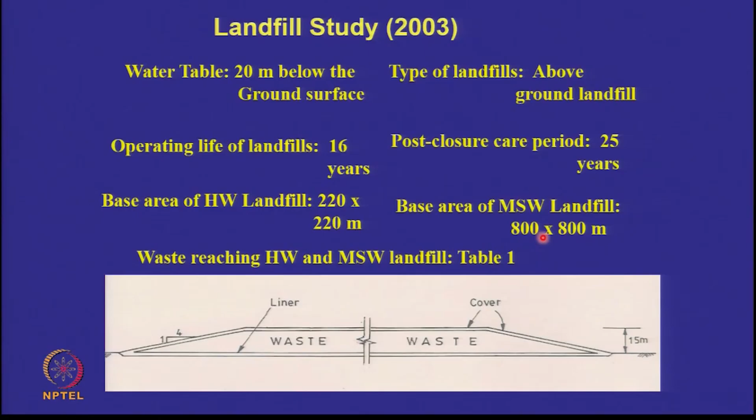First I'd like to look at a landfill study, for the year 2003. It was for an above ground landfill. Water table was 20 meters below the ground surface. Operating life was 16 years. Post closure care period 25 years. Two types of waste, hazardous waste, then the size of the landfill is 220 meters by 220 meters square.

And municipal solid waste, 800 meters by 800 meters. So first let's look at the municipal solid waste landfill. 1000 tons per day of waste coming in. Total height of the landfill was 15 meters, out of which the liner plus cover would take 2.7 meters, and the balance 12.3 would be taken by the waste and daily cover. As a thumb rule, your daily cover may be 10% of the waste.

Remember that the total height of the landfill is 15 meters, 2.7 has gone into the liner and cover. That's why people keep wanting to make the liners and cover thinner and thinner. If you put a geosynthetic clay liner instead of clay, you will get a meter or 90 centimeters. If you put a geocomposite drain instead of sand, you will get 30 centimeters more.

So everybody wants to make this thinner and thinner. But we are going to look at this case: if 700 tons per day comes in onto the same area, the height is about 11 meters, and if 1300 comes in, it's about 20 meters. Here the base area is 800 meters by 800 meters, whereas here the base area is 220 meters by 220 meters. Here it's tons per annum, please see, this is TPA and this is TPD. The amount of hazardous waste which comes out is normally much smaller than the amount of municipal solid waste which comes out in any urban area.

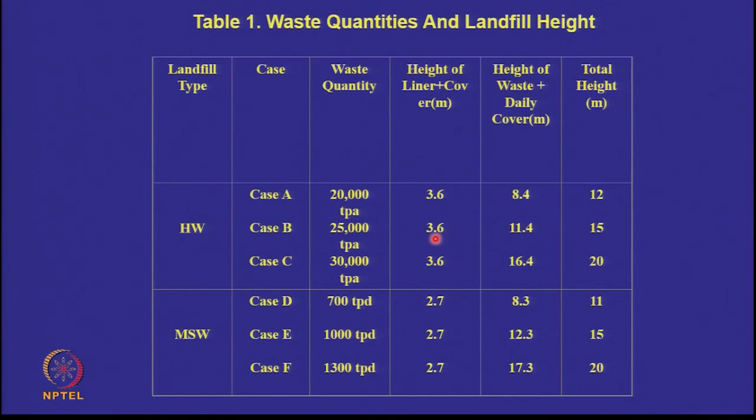So here we are talking of a hazardous waste landfill. The height of liner and cover has gone up from 2.7 meters to 3.6 meters. You can go and look back at the components. Here the base case is 25,000 tons per annum. 15 meters will be the height, 11.4 meters for the waste and daily cover, and 3.6 for the liner and cover. We are going to look at liner costs, cover costs, landfill costs, and influence of the height of landfill.

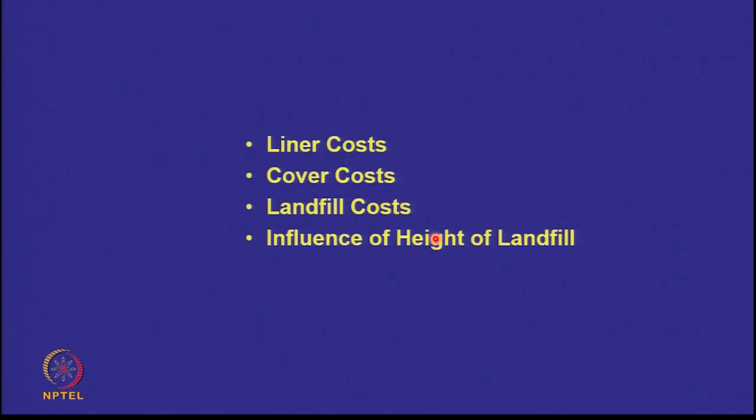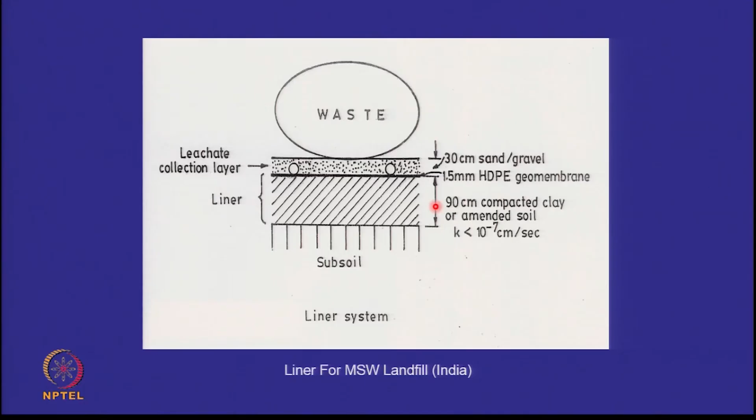Let's just recall, this is our liner for a municipal solid waste landfill. Thickness is 0.3 plus 0.9, 1.2 plus other elements. If you look at it very closely, it is going to have many more components: a separator filter, the leachate collection layer, a protector, the geomembrane, the clay, and a separator filter. So many layers.

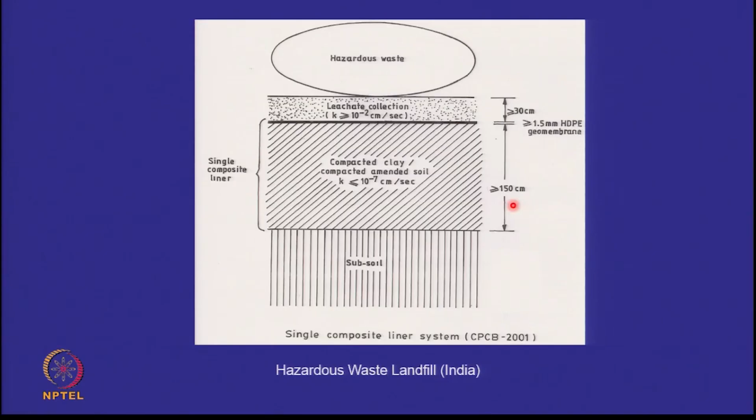If I look at the hazardous waste landfill, this becomes even thicker. This is 1.8, 0.3 here, 1.5, 1.8 meters just at the bottom. If it's a double composite liner, there are even more elements.

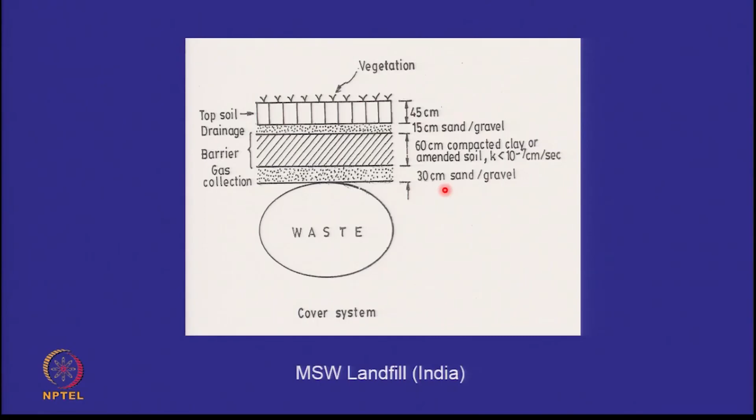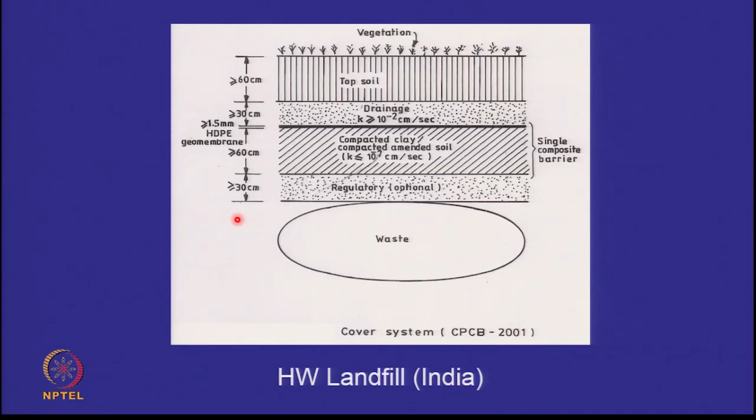Similarly, if you look at the cover, in the municipal solid waste landfill: 45 cm, 0.45 and 0.15 and 0.6 and 0.3. So this whole total becomes 1.5 meters. 1.5 at the top, 1.2 at the bottom makes it 2.7 meters, which you saw in the table that I had shown you. If you have a hazardous waste landfill, 0.6 and 0.3, 0.9, 0.6 and 0.3, 0.9, that becomes 1.8 meters at the top for the cover. So out of the 15 meters, 1.8 meters is being taken by the cover, and similarly 1.8 meters is being taken by the single composite liner.

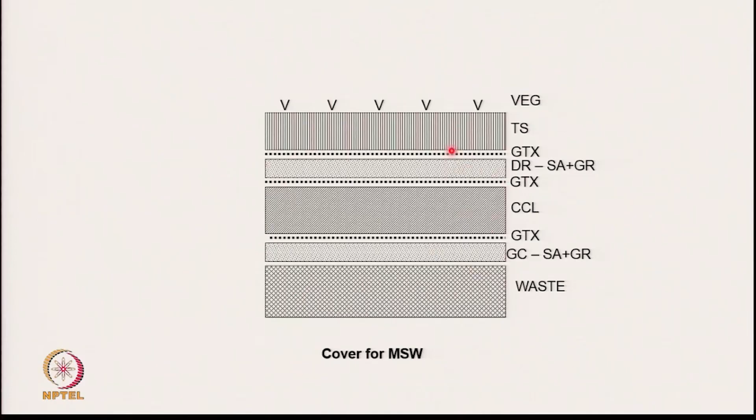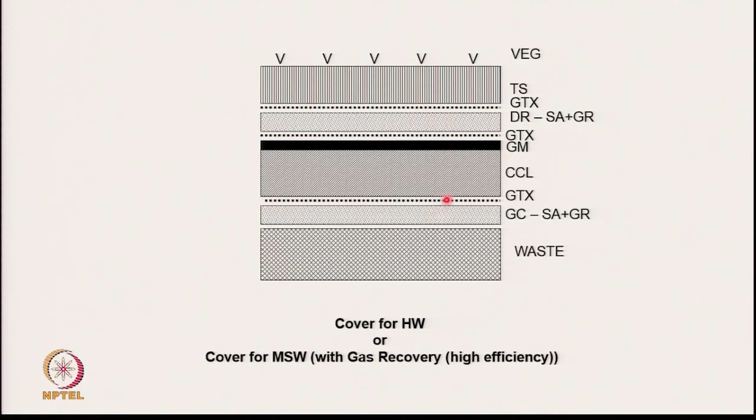And again, in the cover you have many interfaces, and if you are trying to recover methane gas as well, then you have to put a geomembrane. So this becomes the cover for municipal solid waste landfill also and hazardous waste. But remember, in municipal solid waste landfill, the thickness of the elements is different from the hazardous waste landfill.

So to estimate the cost, you need to know the cost of materials. In 2003, when this exercise was done, the cost of placing, spreading and compacting the waste was rupees 50 per cubic meter. It's like a huge earthwork problem. You understand this? Earthworks, you want to make an embankment, how do you pay the contractor? You have to construct a road embankment from here to Meerut, 5 meters high. How will you work out the cost of the project? Fundamentally, it will be the cost of earthwork.

You will find out the volume of the earth, multiply it by the unit rate at which the earth is available, at which it can be transported, at which it can be placed with compaction. You multiply and you get a value.

Same thing here. Once the waste arrives at the site, you place it, spread it and compact it, and the cost of that is 50 rupees per cubic meter. If you have local soil which you are going to use as topsoil, the rate is 120.

This is 2003, please note, 14 years ago, so these were the rates at that time. Medium fine Yamuna sand 200 rupees per cubic meter, Badarpur sand 400 rupees per cubic meter (coarse sand), gravel 550 rupees per cubic meter, clay from 200 kilometers 600 rupees per cubic meter, amended soil - Delhi silt plus 5% bentonite - 250 rupees per cubic meter.

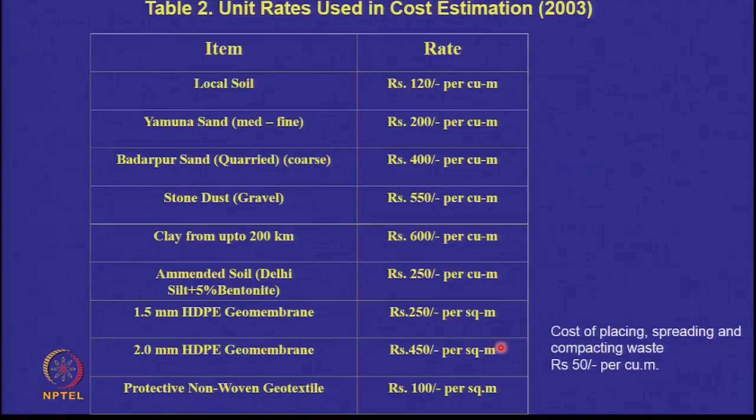So I am giving you an idea of what these cost in 2003. I will also give you the values today. Just before coming to this class, instead of looking at a CPWD manual, because they may not have everything regarding geomembranes and geotextiles and their unit rates, I rang up a civil contractor friend of mine and said I'm giving this lecture today, I need the latest rates, and I'll look at it a little later. But let's see what this study threw up.

Now, to do the costing of a liner system, you know the thickness, you know the areas, you work out the volume of material required. So if I look at the liner system, I would have a leachate collection layer, a geomembrane, a compacted clay layer, a filter between the waste and the leachate collection layer, a protector between the leachate collection layer and the geomembrane, and some pipes, sumps and pumps.

So these are the quantities multiplied by the unit rates for the municipal solid waste landfill, and these are the quantities multiplied by the unit rates for the hazardous waste landfill. This is 800 by 800 meters square - the amount of waste coming in is much larger. This other one is 220 by 220 meters square.

So you get some figure at the end which you can convert into cost per square meter, just like we have cost of construction per square foot. The figure which comes out for a liner system here in 2003, with a landfill height of 15 meters, was 800 rupees per square meter for municipal solid waste and 990 rupees for hazardous waste. But this is a single composite liner.

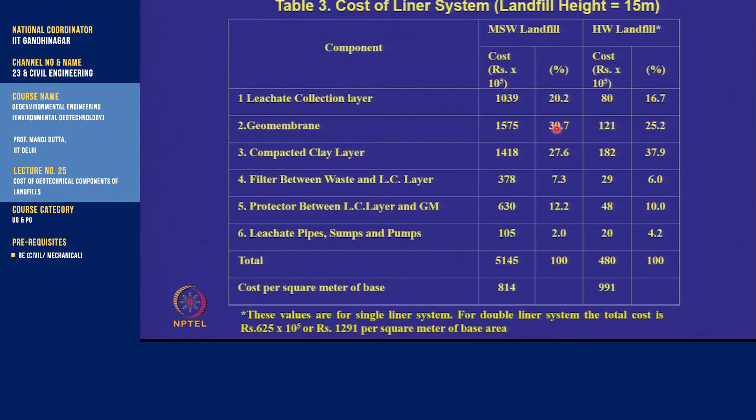If you go to a double composite liner, it became about 1300 rupees per square meter, separately listed here. So remember, the geomembrane, the leachate collection layer and the compacted clay layer are the main components of this cost.

Let's now look at the cover costs. Now we have become experts. Topsoil, then drainage layer, then geomembrane, then compacted clay. Here in the municipal solid waste you don't have this geomembrane. Gas collection layer, separators between this layer and that layer and this layer and that layer.

Similarly to what we did, this cost comes to 590 for municipal solid waste and 1000 for hazardous waste. Is this more than the liner or less than the liner? You remember what was the cost for the liner - about 800, and this is about 600, and the reason is there is no geomembrane in it.

Should I put a geomembrane in it? What will happen? The cost of geomembrane I showed you is 250 rupees per square meter - that will get added onto it. So the cover is no cheaper than the liner. First, please remember that, especially if you are trying to extract methane gas.

Look at the hazardous waste landfill. What is the cost here? And what is the cost of the single composite liner? 990. So it's the same cost. Similar costs are emerging.

Then let's look at the total landfill costs and see what is the contribution of the cover and the liner to it. There's the site acquisition cost. So I told you, don't take land costs into account. Mostly for these projects, the government will give these at nominal value, because either they'll be self-operating the landfills, the municipalities, or even if they give it to an operator, you can't sell it at a commercial value. It's your waste and my waste. If you give it to an operator, you will charge him for the land, and he will charge us back at the tipping fee point. So there's some site development cost, site assessment, site development, roads and everything.

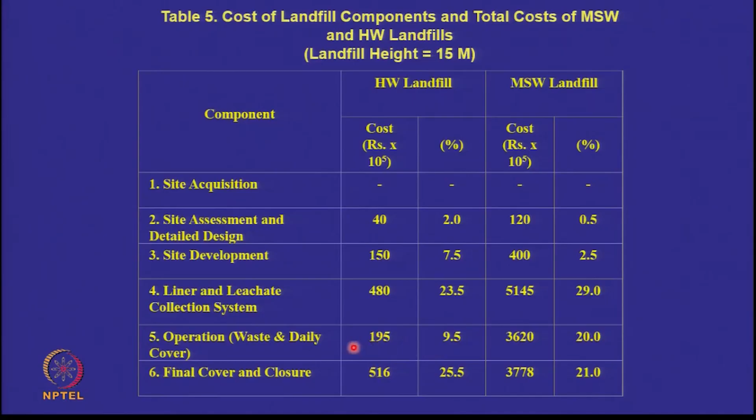Then the contribution of the liner and the cover will go down. So an important thing is, height of the landfill plays a significant role as far as the percentage contribution to the cost of landfilling is concerned.

So if you want to have a low impact of the cost of liner and cover, don't make low height landfills, make high landfills, because neither is the liner going to become thicker nor is the cover going to become thicker if you go higher.

Are you understanding what I am saying? Therefore, the percentage contribution of the liner and cover go down.

It is like if you have a cost of land, you want to share it amongst more people, please make your building higher, and the cost of land will become shared by more people.

Also, per square meter, I think it's not shown here, but the hazardous waste landfill is costing us 2000 lakhs. And what was the area of this landfill? Yeah, 220 by 220. So you can figure out what is the cost per unit area.

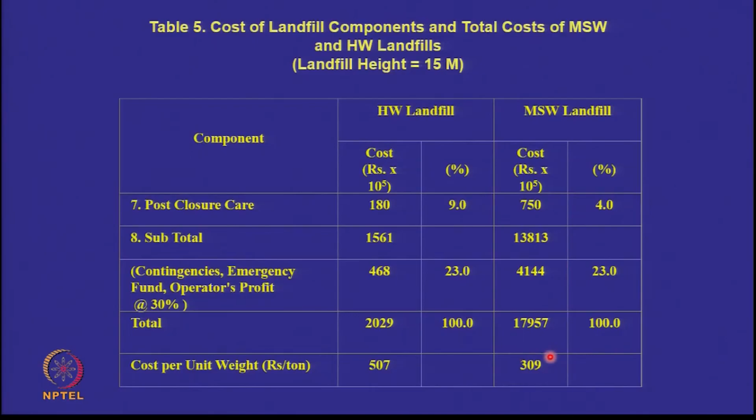So the important thing for you to note is if I divide it by the weight of the waste inside the landfill, then the cost of landfilling is 500 rupees per ton here for hazardous waste, single composite liner, and it's about 300 rupees per ton here for municipal solid waste, right? So you can understand what is the cost of landfilling per ton of waste, right?

Now, I had taken municipal solid waste 1000 tons per day, 15 meter high, and my value is 309.

If I make the landfill height 20 meters, the cost of disposal is 250 rupees per ton. But if I make it lower height, the cost goes up. So what we're trying to say is that as the height of the landfill changes, the cost of disposal per ton goes down, because the contribution of the liner and cover goes down. But do remember, your landfills are going to cost between 3,000 to 5,000 rupees per square meter at 2003 values.

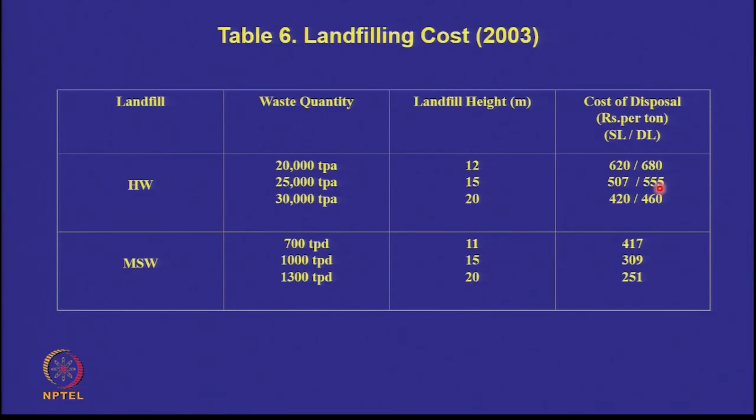Similarly here you'll find the same thing. For 15 meter high single composite liner, the landfill was 500 rupees per ton, and for double composite liner it is 555 per ton. Do not treat these as absolute values. Different cities will have different costs of materials. If topsoil is 120 here, it may be 200 somewhere else. If sand is 300 here, it may be 700 somewhere else. So this is not uniform across the country.

Now let's do a simple method for estimate of cost of liner and cover. Cost of liner and cover, if we recall correctly, for hazardous waste landfill was almost 900, 1,000. So landfill cover plus landfill liner for the hazardous waste together would be 2,000 rupees per square meter, and the total cost was 5,000 rupees per square meter, showing that about 40% of the contribution of the landfill is from liners and covers. Now let's come to today.

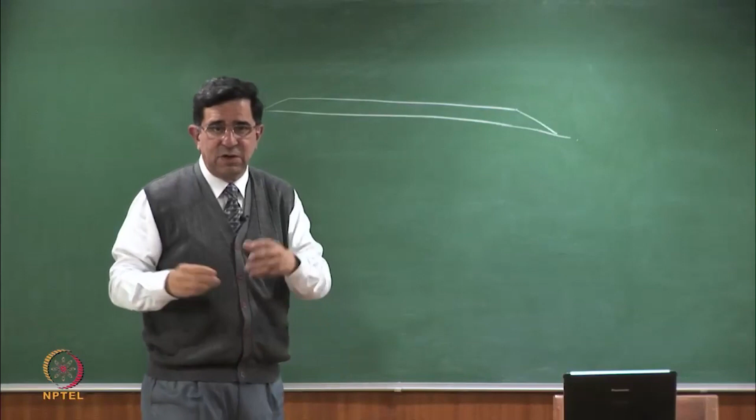Let's try and see, can we do this simply? All I'm going to say is, if this is your landfill - and I've often told you landfills are like this. We make them in various strange ways in various books, but more or less landfills are thin and broad. So let's take 1 square meter.

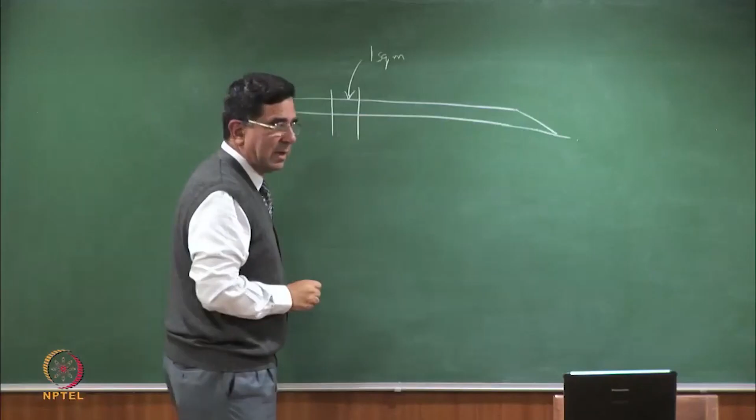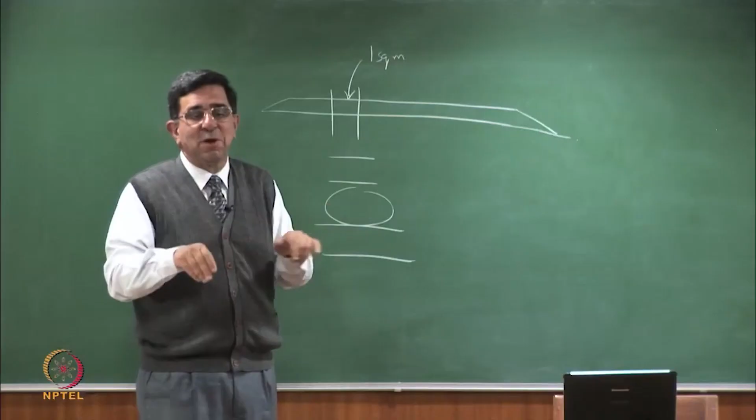When I look at 1 square meter, I'm going to have a cover, then the waste, and then the liner. So all that I've got to do - if I give you the unit rates, if you know the thicknesses, and if you know the rate per square meter of a geosynthetic - you can compute the cost of placing this and the cost of placing this. If you add this, it should be about 40% of the total cost. That's what we've done, but we would get an idea as to what is the current cost per square meter.

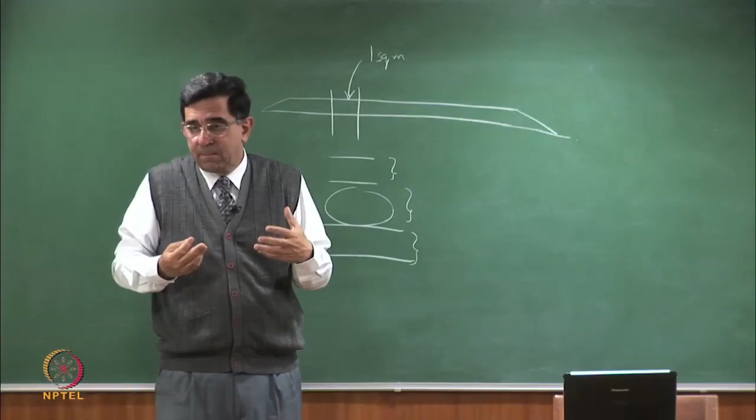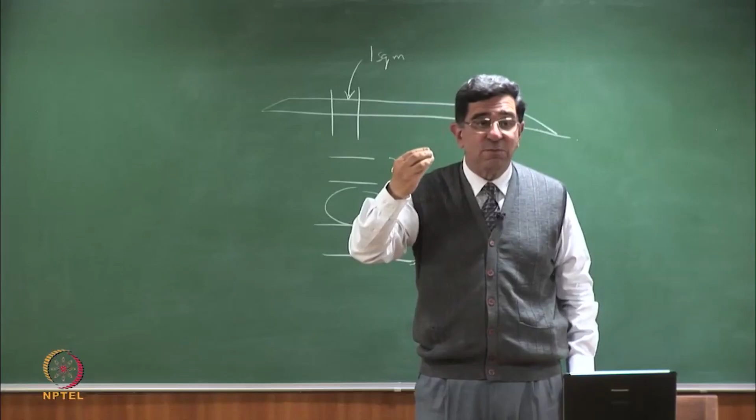Agreed? So let's look at this simple method. First, let's look at what's happened to costs. In our first 2003 example, there was no computation of how much it costs to make grass grow at the top, because all landfills must have a green top.

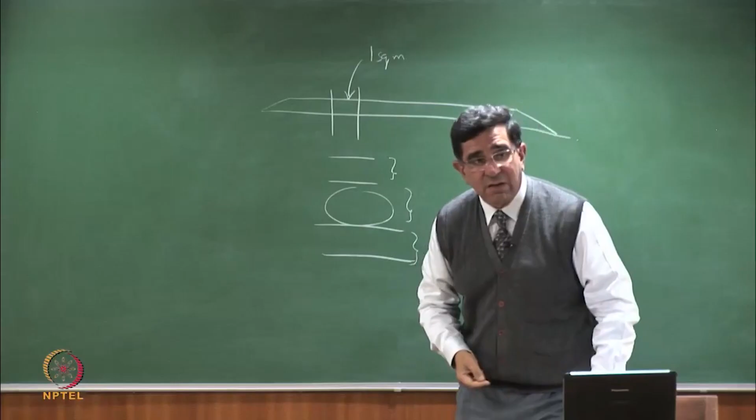Now we have a handle on it, having done 4 or 5 landfills across the country over the last 5 to 10 years. Today, if you want to get an outside contractor to plant grass at your landfill and establish it in 3 months, he charges you rupees 80 per square meter.

Local topsoil is typically not available, but if it's getting excavated somewhere and you want to use it, it may be available to you at 200 rupees per cubic meter. Otherwise you'll have to dig up your own soil from the landfill if you want to use the local topsoil. Medium to fine sand in Delhi is now available at 500 rupees per cubic meter. Coarse sand and gravel is available at 1,500 rupees per cubic meter. Clay from 300 kilometers is available at 2,000 rupees per cubic meter.

The HDPE liner today is 350 per square meter, and the non-woven geotextile 200 GSM is rupees 100 per square meter, and 400 GSM is 200 per square meter. We are going to use the thicker geotextiles in the bottom liner area because the overburden stress is very large, and we can use the lighter ones at the top - though I don't agree with it, but still people are using the lighter ones. Additional data: leachate treatment costs about 5 rupees per liter, and waste placement and compaction now costs about 100 rupees per cubic meter.

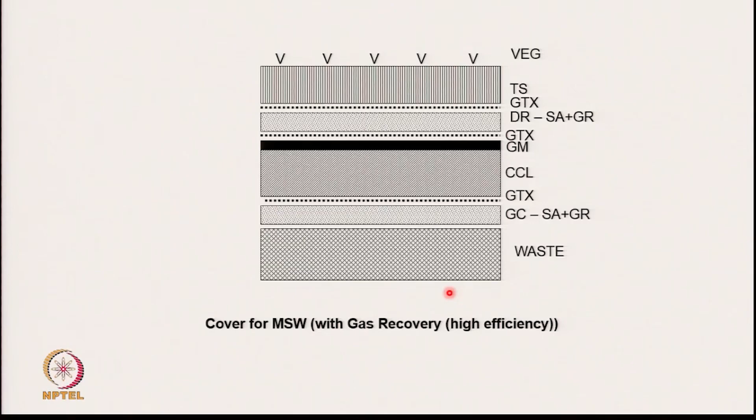And I am going to use this example, except that I also introduce a geomembrane because I want to recover the gas. If I don't want to recover the gas, then I don't need a geomembrane, but if I want to recover the gas, I'll put a geomembrane here. And therefore, these are your interfaces - cover. So let's quickly go through what are the elements.

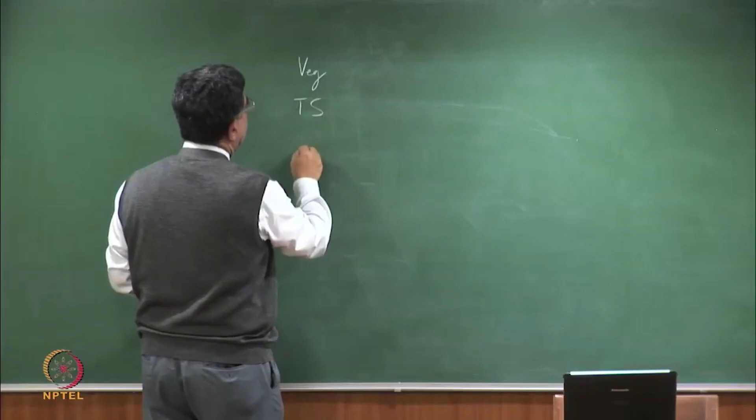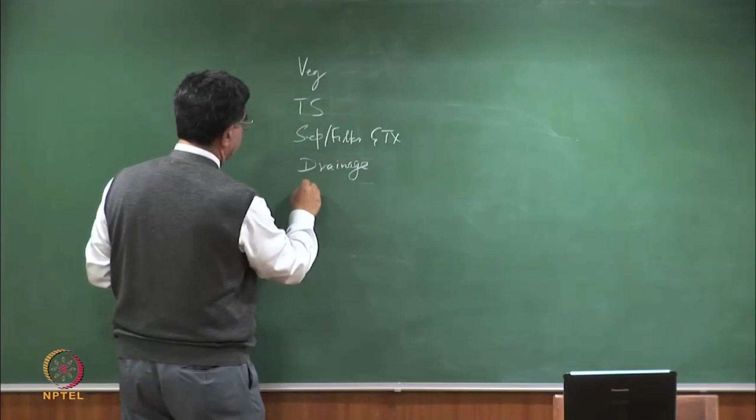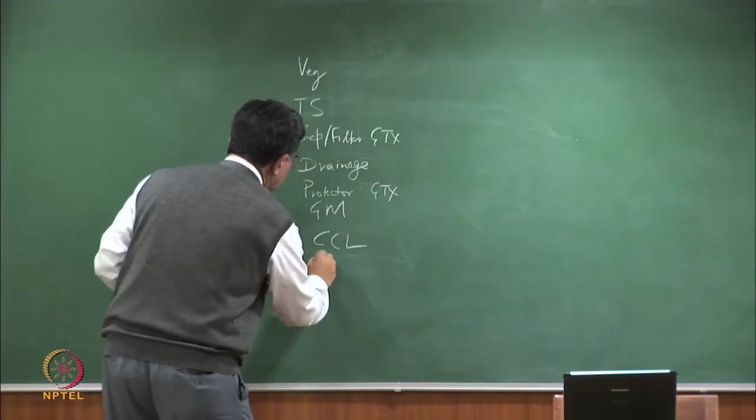If I come down the cover, I need to put the cost of vegetation followed by - there's vegetation, topsoil, then I have a separator filter, which will be a GTX for me, then a sand drainage layer - you'll have to decide what you want to use - then a protector, that's again a GTX, then geomembrane, then compacted clay liner, then separator filter, then gas collection layer, and then the waste.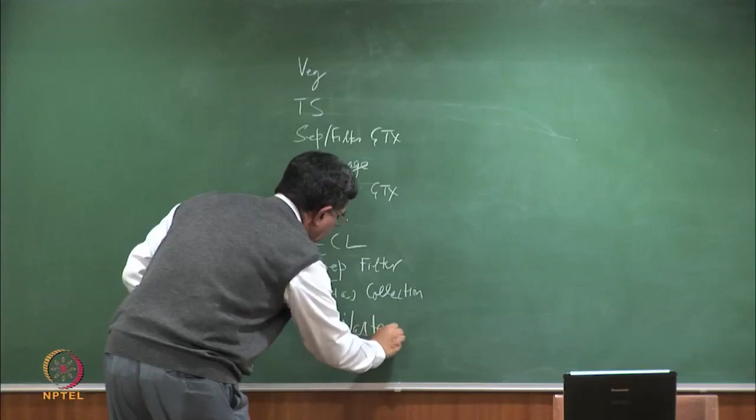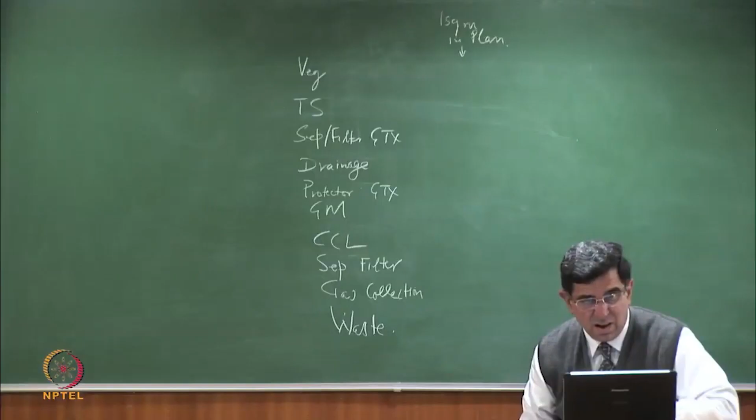Okay, now for 1 square meter in plan, I want you to fill in these costs. You need the unit rates, I'll bring the unit rate slide back. Do you understand what has to be done? You take a square meter of plan area and tell me the cost of all the elements per square meter, because in the end you want the cost of the cover and the cost of the liner per square meter, right?

So the first one will be 80, because that value is given per square meter, not per cubic meter. So that will be the cost of developing 1 square meter of grass.

What about the local topsoil? How thick is the local topsoil? 0.45. If you don't remember, I'll show you again. It's 0.45. If it is 0.45 and the rate is 200, how much will be the cost? 90.

Will you divide? Cost is per cubic meter. Your plan area is 1 square meter, your depth is 0.45 meter, so the amount of material required is 0.45 cubic meter. 200 rupees into 0.45 will give you 90 rupees.

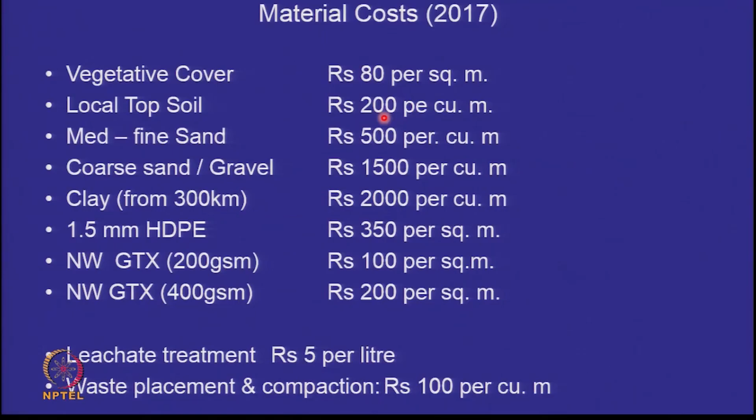Okay, you will not use medium fine sand. You will at all places be using the coarse sand gravel. So again remember that the drainage layer is 15. In between you will have the geotextile.

Does everybody have this? 200 into 0.45, 100 GSM, 0.15 into 1500, 100 GSM, 350, 2000 into 0.6, 100, 0.3 into 1500. So the total cost of the cover per square meter is now almost 2700.

What was it in 2003? We had done it in the slide earlier. It was much lower than this. We'll go back and show it to you.

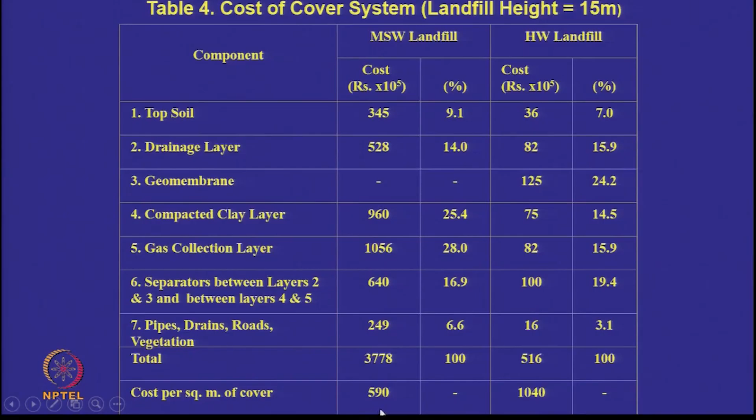This is the cost of the cover system. For the municipal solid waste landfill, the cost of cover per square meter was 600 rupees. And now it is, as per the rates which I have given you, 2695.

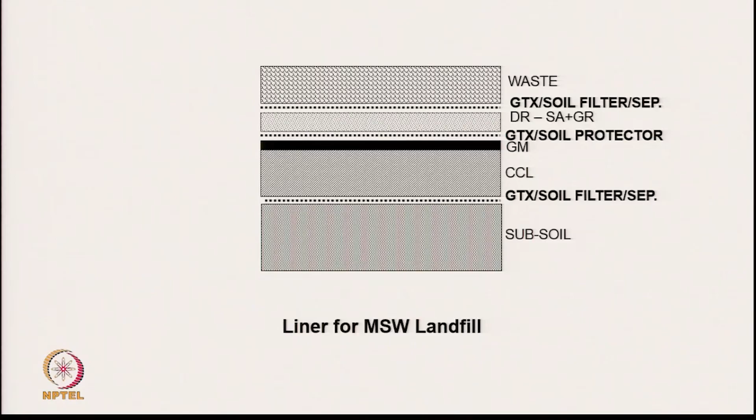Similarly, I can do the calculations for the liner, and for the municipal solid waste landfill, the liner cost is about 3200. So if I now add the liner cost to the cover cost, how much does it become? 2700 plus 3200 is how much? Yeah, so it's about 6000 rupees per square meter for the liner and cover.

How much does it cost for you to make a house? 6000 rupees per square meter, approximately 600 rupees per square feet, right?

So all that we are trying to say is it's about today 6000 rupees per square meter for a liner and a cover, and if these are 40 to 50% of the total cost, the total cost of a landfill becomes 12,000 rupees, and the cost of municipal solid waste disposal as per the rates and as per the size that we have done is about 491.

If instead of putting 15 meter high, I had put a 30 meter high landfill, which we don't do because of visual reasons, then the cost would have been lower, because in the same area I would be accommodating much more waste. So the cost is high because of this. What is the one which is contributing the maximum in terms of cost here?

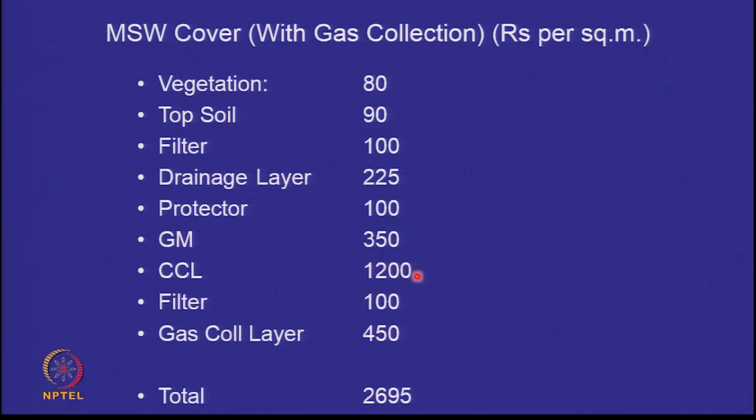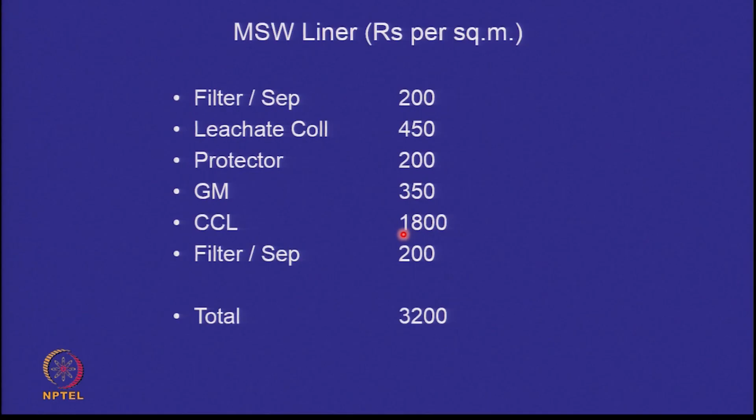Please note, in this 2695, 1200 comes from the clay. In this 3200, 1800 rupees comes from the clay. Can I reduce it? The clay is very expensive because I am bringing it from 300 kilometers.

What will happen if I replace the compacted clay liner by local soil plus 10% bentonite? What's the cost of local soil? 200 rupees. What's the cost of clay? 2000 rupees. What is the cost of local soil plus 10% bentonite?

Bentonite in the market comes in bags like cement. It is used as a drilling fluid and it costs approximately the same as cement. A bag of cement, about 50 kilograms, will cost you about 300 or 350 rupees. You can Google it up, find the value of cement in Delhi to the nearest 50 and use that computation. What is the effect of replacing the compacted clay liner by local soil and 10% bentonite? That cost will be much lower because the 2000 will be replaced by a much lower value.

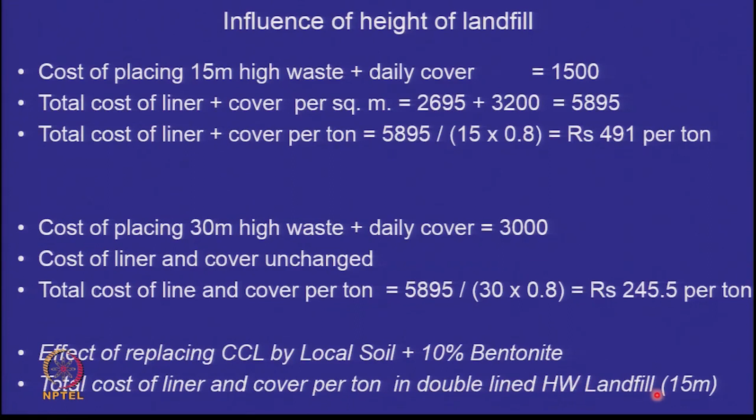The total cost of liner and cover per square meter and per ton if I had a double lined hazardous waste landfill. We have solved this example for a municipal solid waste landfill, but if I had a double lined hazardous waste landfill, what will be the cost? Have a good day.